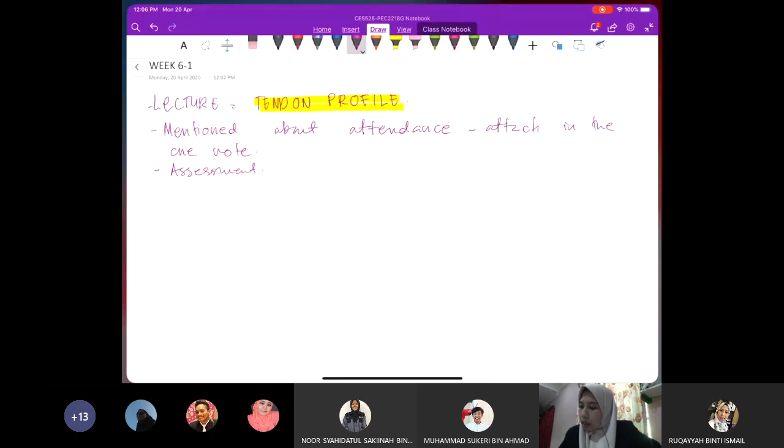Okay. So today, for your attendance, I want you to pay attention to the content library. Your content library, where you can see your attendance. Okay, does it come up? Later on, I will put the attendance for week 5 somewhere here in this folder, in this section. I didn't finish analyzing yet, but I have copied and pasted it into a proper table, but I didn't put it in OneNote yet.

So I just want you to be aware that when I checked the QR code attendance, there are a few students who didn't scan the QR code at all, like 0, and I don't know, you forgot, or I don't know what is happening. But I think for week 5 it is acceptable because it was just our first trial of the system. So I hope this week you will be better.

Like I said before, at least try to make at least 2 QR code scans throughout the week. I know you can assume anything you want, but I hope for honesty here. That means once you scan the QR code, it shows that you are going through the notes, or you are doing exercises, you open the slides, or you open the video and things like that. Anything related to the course means you deserve to scan the QR code.

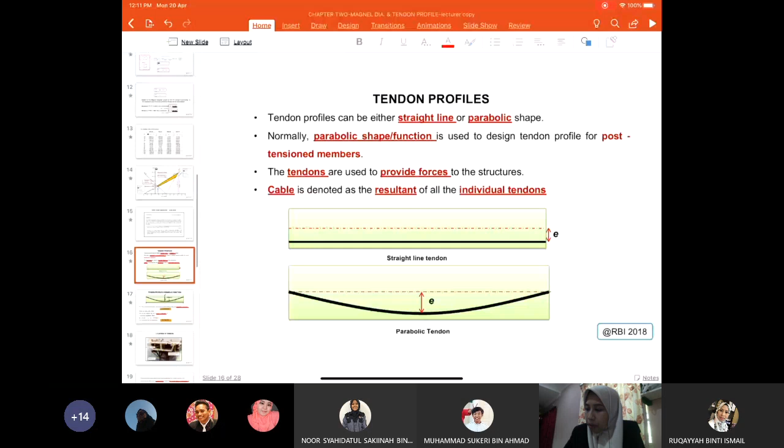So let us continue our next lecture. Inshallah it's a very short one. Because when I see your assessment, the assessment on the Magnel diagram, the example that I asked you to redo and so on, I hope you guys are clear about how to construct a Magnel diagram. And then I did receive a question on WhatsApp during the weekend, which is good, alhamdulillah.

So I know that you guys are trying to do it, trying to understand it, which is important. Okay, so anyone else who has any problem regarding the topic that we had gone through last week, please let me know. And then please take note, the assessment, I put some kind of range, deadline and so on. It's not really a deadline. It's just a matter of taking note who submitted earlier, who submitted later, that's all. Because there's no marks given. So if you didn't want to do it, I cannot force you to do it.

Okay, but of course for you to be able to understand, you need to do some practice, because this is a calculation. You cannot just read and understand it directly. You have to try and do it yourself. So it's just a medium that I prepare for you so that you can try it yourself. That's all. So don't feel stressed out with the task given. It's not really like you have to submit it, and if you didn't submit, then you don't get marks and so on. There's no marks actually. It's just for you to try and do it and understand it yourself. And of course it's open. You can resubmit. You can submit it anytime you want.

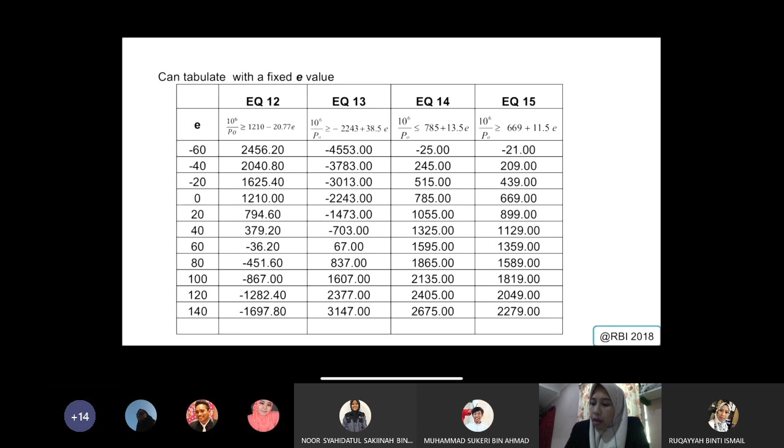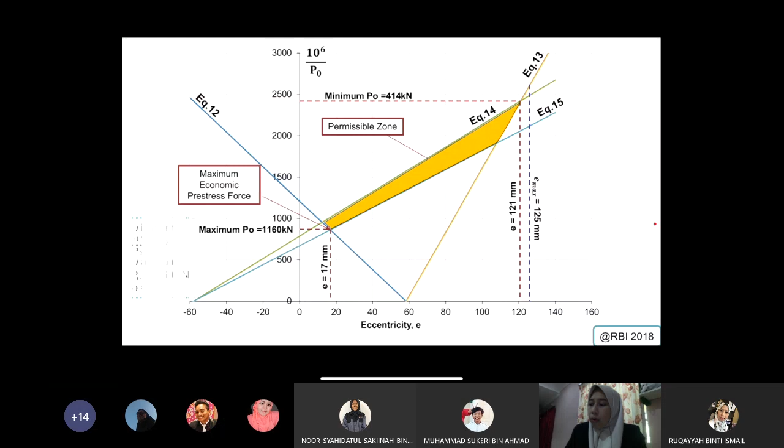Shouldn't be a problem. Okay, so we start with our next method, which is tendon profile. So at this point, what we have gone through before: we know already our E, and we know already our pre-stress force. Because through the Magnel diagram that we construct, we can identify the range of pre-stress force that we want to apply to our pre-stress beam, and also the position of the tendon. So at this point, these two parameters we know already. Once we have our Magnel diagram, next we justify it with another profile that reflects the behavior of the tendon throughout the length of the beam. This we call the tendon profile.

This tendon profile is where we want to see how the tendon behaves, the shape. So it can be either a straight line or a parabolic shape. Normally a parabolic shape or function is used to design the tendon profile for post-tension members. Why post-tension? Because when you have pre-tension, normally you don't have the profile. If you remember the video that we watched in class, with post-tension we have the conduit and the tendon placed before the concreting, right? So before the concrete, you see the shape of how the tendon is laid throughout the length of the beam. That's why mostly tendon profile is used for post-tension, meaning we tension it after concreting.

So the tendons are used to provide forces to the structures. And the cable is denoted as the resultant of all individual tendons. Sorry. Normally we have more than one tendon in one beam, so we call it a cable where we have multiple tendons. So instead of the Magnel diagram, where normally we have the cross-section of the beam, where we estimate the neutral axis and the position of the eccentricity, the E, and so on, the relationship or equation we derive from the section of the beam.

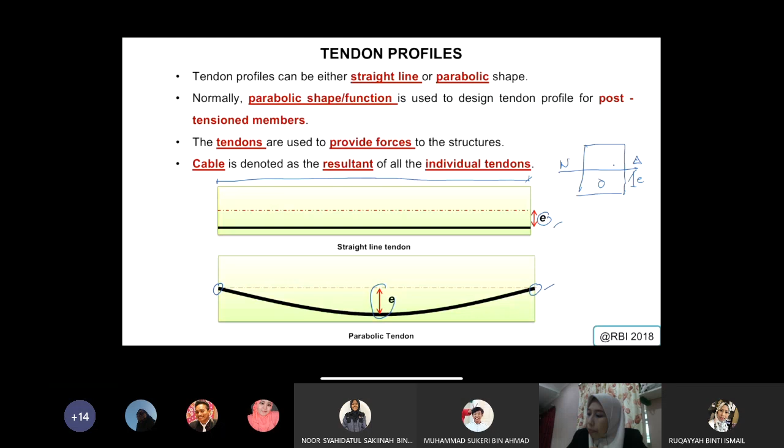And we also can have what we call a parabolic tendon. When you have a parabolic tendon, normally it will have 0 and 0 at both ends of your beam, and you have the maximum eccentricity occurring at the mid length of the beam. So we don't really have a problem when the tendon is a straight line.

We have issues in terms of estimating what will be the value of y, for example at this point, when the tendon is a parabolic shape like this, like what we see in the slide. So this is what we call a post-tensioned beam. Normally we assume that the tendon will behave parabolically.

So we assume that the tendon will have what we call a parabolic function, or quadratic. You're familiar with the quadratic function, where y = ax² + bx + c. So at this point, we want to know what the y value will be, which will be the a.

And then x will be the distance from the end to the mid length of your beam, and you have your L, the actual length, and so on. So these are all the parameters. So how to get the values? We assume that when x = 0, y = 0, so c = 0.

At slope 0, you differentiate this equation with respect to x, then you will get 2ax + b. With 2ax + b, and assuming your coefficient b = 0, you can conclude that at x = L/2, y = a, and A = 4a/L². That is where you conclude, because you want to know the value at the mid length of your beam, where x = L/2.

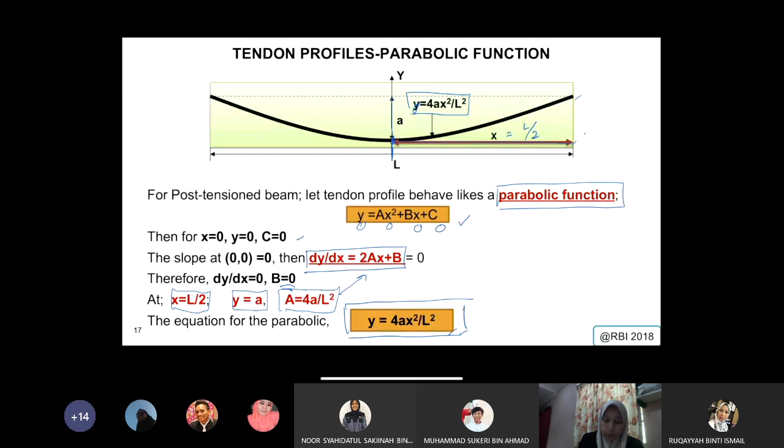So with that, you conclude y = 4ax²/L². This is 4a divided by L to the power of 2. Put all the parameters inside this equation, then you will get these values. I hope I'm clear. Try and put it inside the formula. If you have any problem, let me know.

Okay, location of the tendon. This is just to show you the location of the tendon. This is normally what we call the permanent post-tension tendon. PT is post-tension anchored on the face.

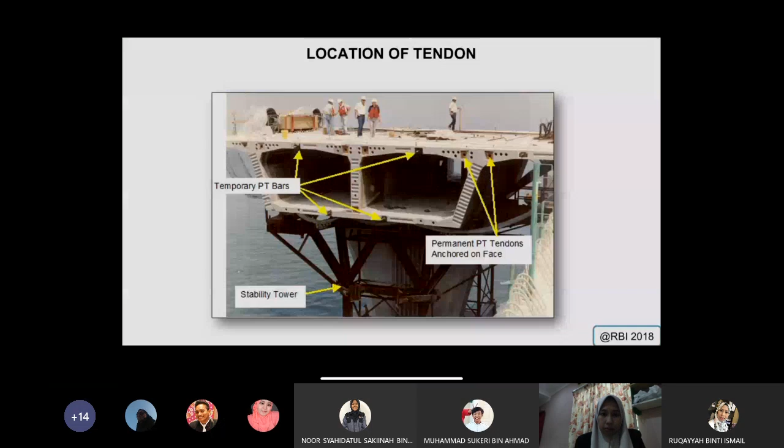Okay, all right. So after the pre-stress force is determined and satisfied at the critical section, which is what we did with the Magnel diagram, it is necessary to determine the eccentricity at which this force must be provided, not only at the critical section but also throughout the length. So in general, from the Magnel diagram, we know the range of suitable pre-stress force. We can check whether it is economical or not and things like that.

But for the tendon profile, you want to determine the eccentricity not only at the critical section. The Magnel diagram identifies E at the critical section because we consider the cross section, the distance from the neutral axis, but you also want to know E throughout the length of the beam. So that is why we need the tendon profile.

So at any section along the member, E is the only unknown term in the four expressions. So for the tendon profile, we're only concerned with the eccentricity value, and this will yield two upper and two lower limits, which must all be simultaneously satisfied. So we have four inequality equations but only one unknown, which is E. This requirement must be met at all sections throughout the member and will reflect the variation of moment, pre-stress force, and section properties along the member.

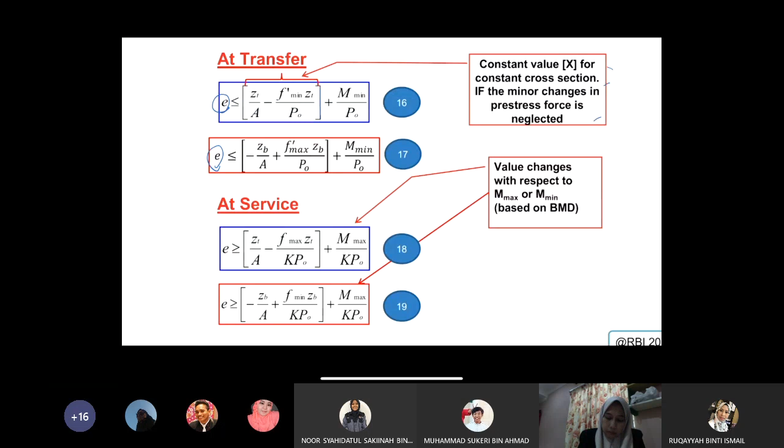So if you notice here, this is what we call the constant of the cross section because these are all fixed. The only one is P naught. If there is a change in the pre-stress force value, normally it will be neglected because it doesn't affect much in estimating the E value, the eccentricity for your tendon profile. So the value changes with respect to moment maximum and/or moment minimum based on your bending moment diagram.

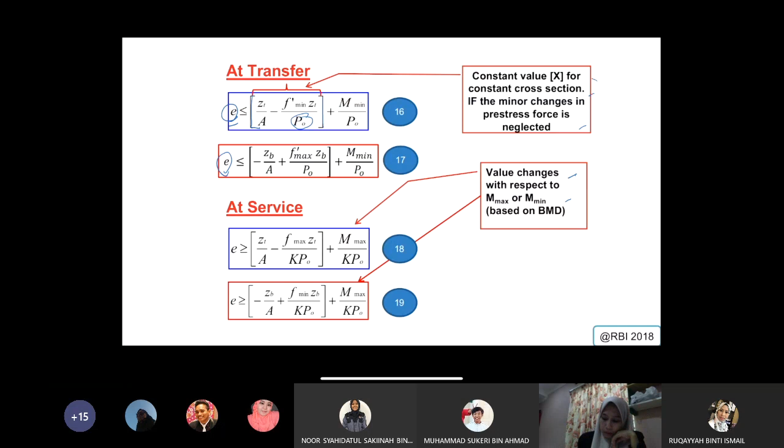So when you're talking about across the length of the beam, you are actually talking about the bending moment diagram, where you know where your moment maximum and moment minimum will be, especially when you have a continuous beam. If it's just simply supported, it's very straightforward, because you're going to have zero moment at both ends and the maximum at mid-length. So you have moment maximum and moment minimum.

So evaluate the equations at any section to determine the range of eccentricities within which the resultant force P naught must lie. Moment maximum and minimum are those relating to the section being considered, so we calculate the moment maximum and the moment minimum. For a member of constant cross section, if minor changes in pre-stress force along the length are neglected, the terms in brackets in the expressions are constants. This is what we mentioned just now.

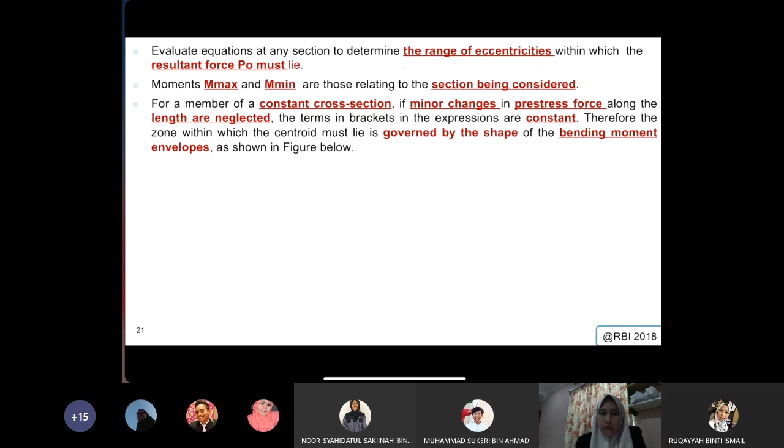Therefore, the zone within which the centroid must lie is governed by the shape of the bending moment envelope, as shown in the figure below. Along the beam, say this is your beam cross section along the length, you identify your centroidal axis. Oops, it doesn't appear on your screen.

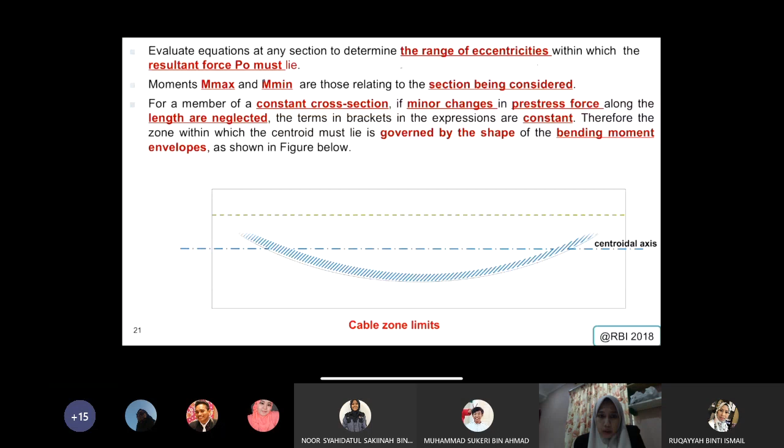All right. You will see this line. Let me try to draw it back. This is what we call your tendon profile at E. This is equation 1. The distance from this point to this point is your moment maximum divided by the pre-stress force. Then you have a second equation whereby you might have another profile.

This is another tendon profile, and then you have M minimum over pre-stress force. So the profile is normally generated from the value of moment maximum and moment minimum, which differentiates one profile from another. All right, so here you have the cross section equations that we mentioned in the previous slide.

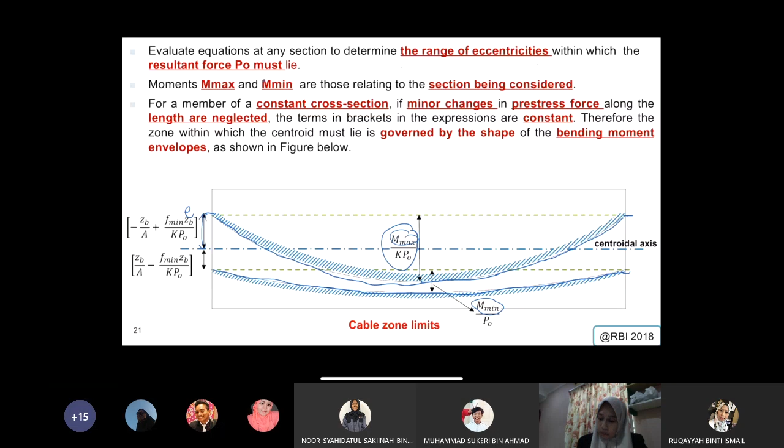All right, so let's take a look at the example. It's quite straightforward to understand. Example 7 continues from the previous examples 4, 5, 6, so all the parameters remain the same. You have limits at mid-span and at the ends of the member designed in the previous example for a constant initial pre-stress force of 700 kilonewtons. So that means we have decided.

Remember that from the Magnel diagram, we have the range of P naught. If I'm not mistaken, P naught has a range of something like 1400 or something, like 400 something kilonewton. So within that range we decided to take 700 kilonewton, having checked the economical prestress, whether it is economical or not. So we checked that and decided to take 700 kilonewton for this question.

So we rearrange the formula. We take e as the main parameter to draw your tendon profile. And if you look into this formula, why I did it like this, actually you can do this for the previous prestress equation as well, because these four equations have the same values, the same z. This one is zt over A, this one is zt over A.

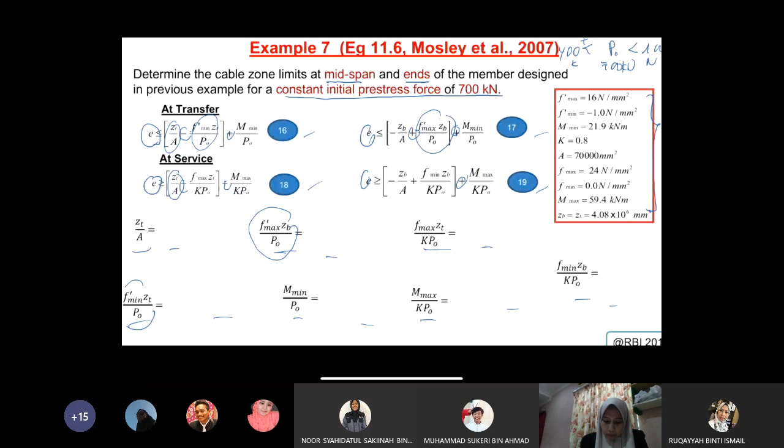And then you have a parameter of f dash maximum. So this is f dash maximum, and this is f dash minimum. So zt, this is f dash minimum. Sometimes the difference is only in terms of plus minus value. So it's good if you calculate all the values separately, then put them inside the formulation. And like this we have all values calculated.

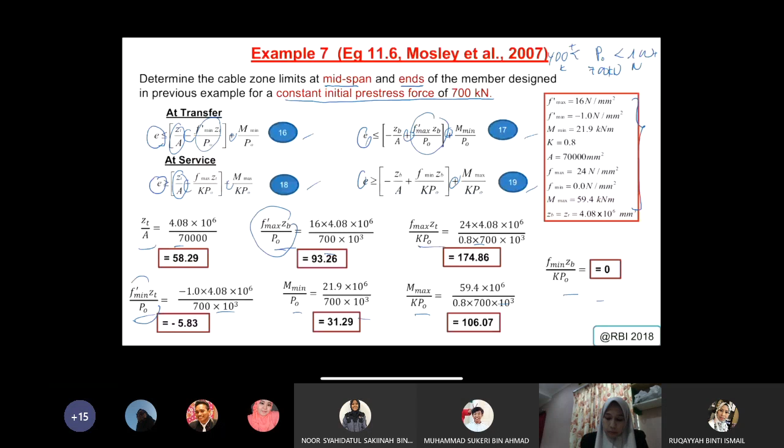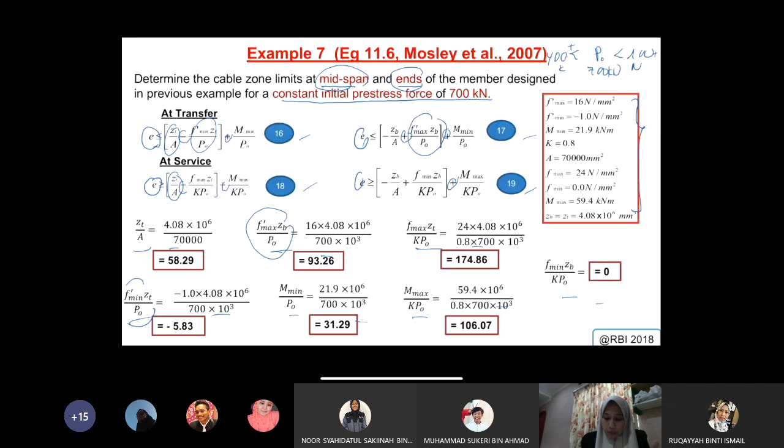Later on, I will give this assessment for you to redo example 7. We have two conditions, whereby the question says determine the limits at mid-span and also at the ends. So in any question given to you, you want to know at mid-span or at ends or both, and you have to identify them one by one. For example, here we identify the ends of the beam first. At transfer, you have this equation plus 0. You look here, it is 0.

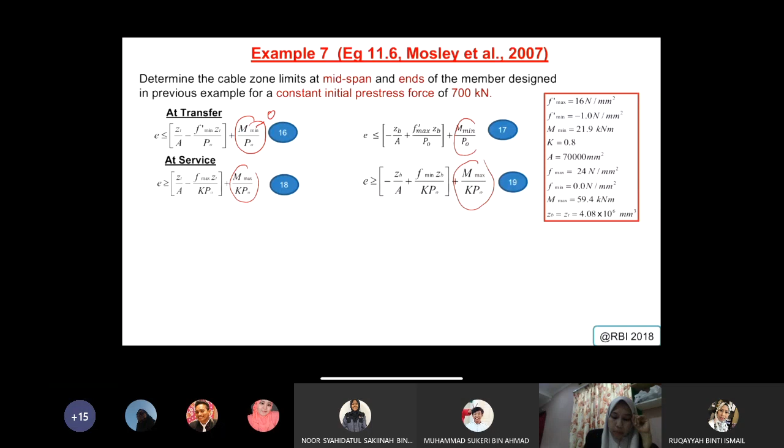At transfer and also at service, the same thing, you have 0. Why 0? Because here it is all moment: moment maximum, moment minimum at transfer and also at service. At the ends of the beam, when the beam is simply supported, the end moment equals 0. So that's why you see every equation plus or minus with 0 at transfer and also at service.

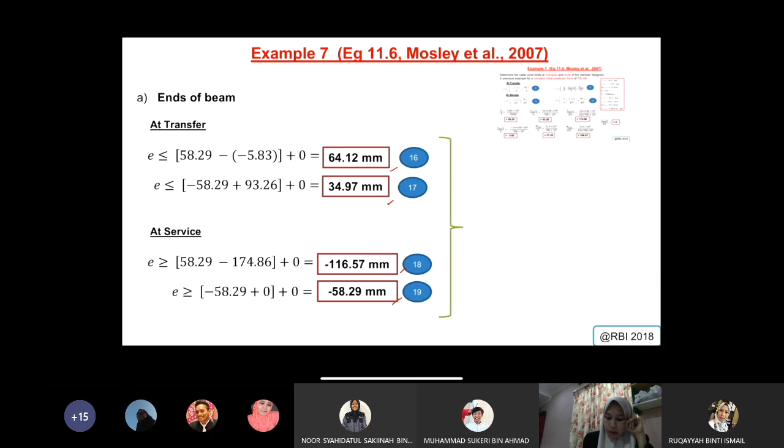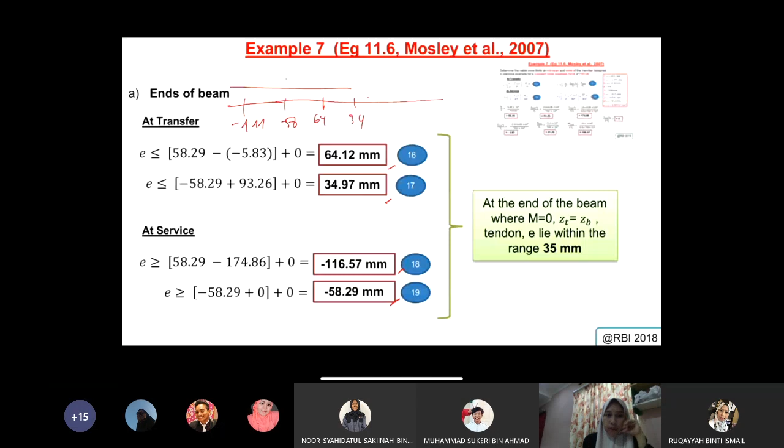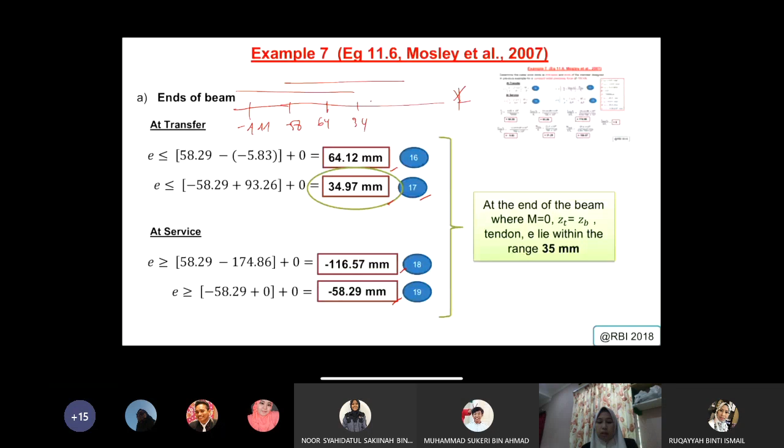At mid-span, we consider this point at transfer. At this point you have a value because we have the moment maximum and moment minimum. Bear in mind how to calculate them: moment minimum considers only self weight, and moment maximum considers all weight. At mid-span, the resultant must lie within 47.8 to 66. When you want to draw, you need graph paper. Draw the tendon profile on graph paper to get accurate scale values.

So in general, at transfer and at service you have equations 16, 17, 18, and also 19, at mid-span and also at end span. This is end, this is mid. So how are we going to draw it? In general, you have this as the height of your beam, your e. The height of the beam we considered just now is 350. Here we already subtract the cover, around 25, 30 like that. So this is the range we estimate for your e.

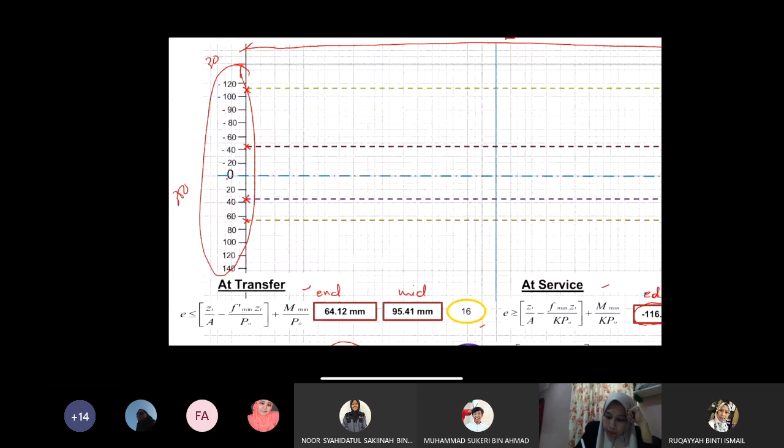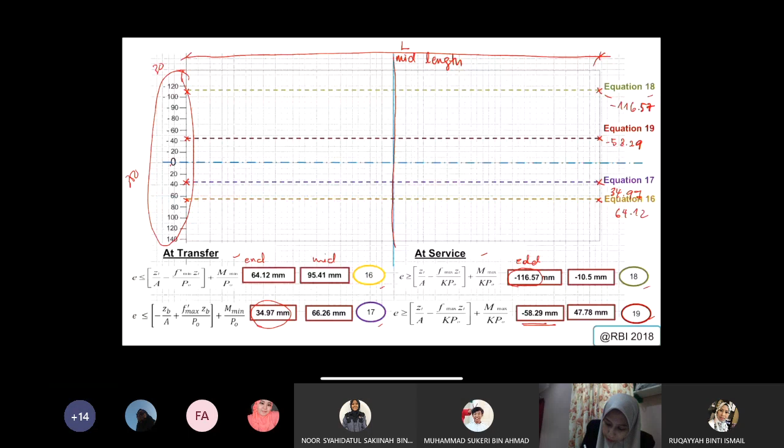Okay, then you mark what we call the mid length. Okay, this is the mid length, the mid length of the beam. Then when you already mark the mid length, you start to make a point. This is one point. Say that I mark it in green, as I put it here. It's green, which is equation 18, which is marked as minus 10.5.

Okay, right? Then I mark the second equation, which is equation 19. The color I put here is red, which is 47.78. Okay, right? Then I mark another color, which is purple. I don't really have purple, so I will just draw orange here instead. So somewhere here, it's a bit confusing. Okay, I draw blue. Blue somewhere here, which will be 66.26, which is this value, equation 17.

Okay, equation 17. Alright, then I have another color, which is the orange one somewhere here, which is equation 16. This will be 95.41. So if you look here, it's actually somewhere here. Okay, 95.41. So that's why it's very important for you to get a good graph paper so that you can get an accurate scale.

Okay, so far you guys following me? Supri, okay? Okay, madam. Who else? Fitri, okay? Okay, madam. Jacqueline, okay? Okay, madam. Izati, okay?

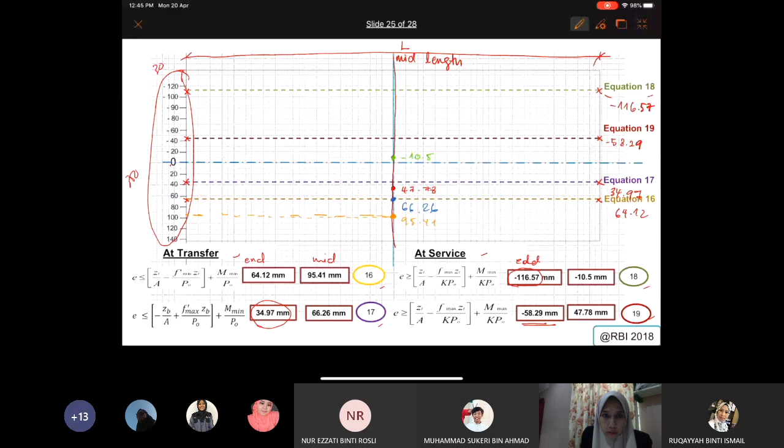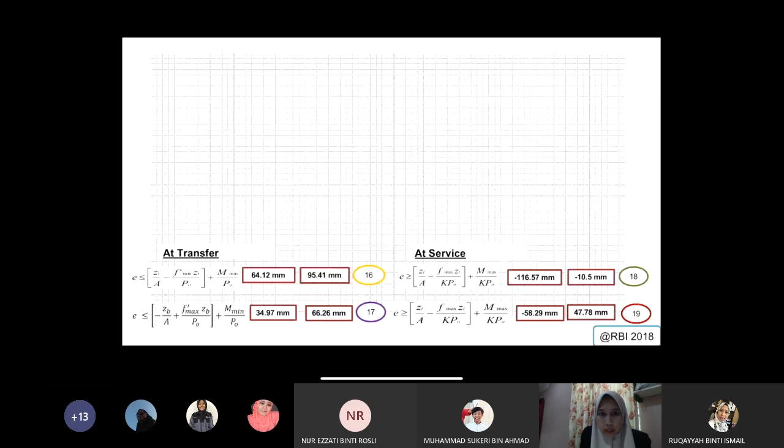The line is a bit laggy, okay. You can see the line, let me start back. Internet a bit slow hari ni katnya. Okay.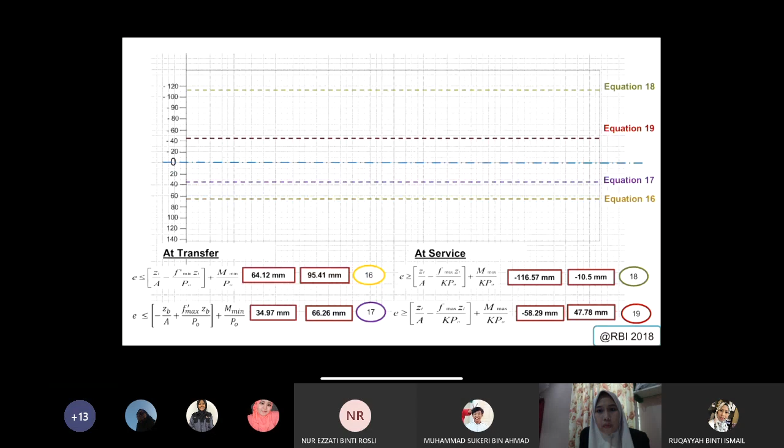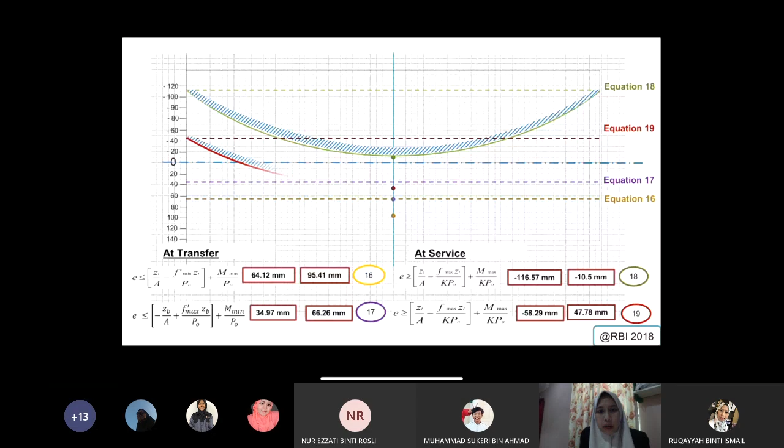Okay, then you have the midpoint. Right, so you have the first line somewhere here. Alright, so you have this point at the end of the beam. You draw it and then you have it at the midpoint here. This is the value. And then you join it to the other side. Since this beam is what we call symmetric, because the section is the same, you have the same parabolic equation, as you can see the right side is similar to the left side. So it's like a mirror profile.

So you do the same thing to equation 19, and also

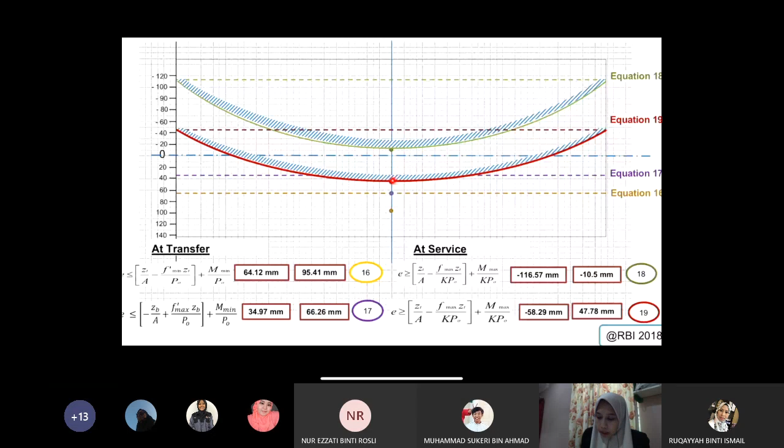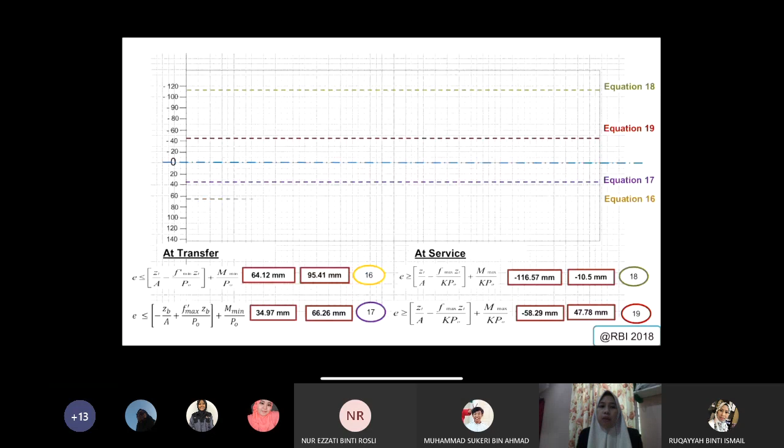Allahu Akbar, sorry. Because the internet is a bit laggy. Cannot see the line yet. So when you run the PowerPoint by yourself, you can see it clearly.

Okay, and then you have equation 17, equation 16. Okay, then you will see this. So you will see the inequality bounded lines, where this is the zone, the range of the zone for your E.

Today's lines are quite bad. I didn't get a smooth one.

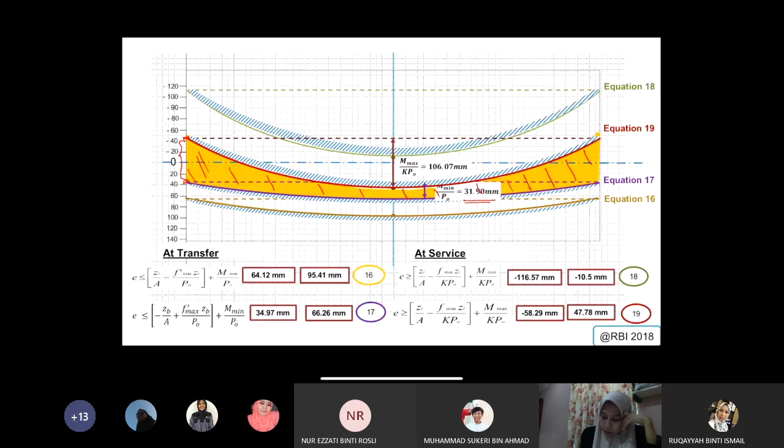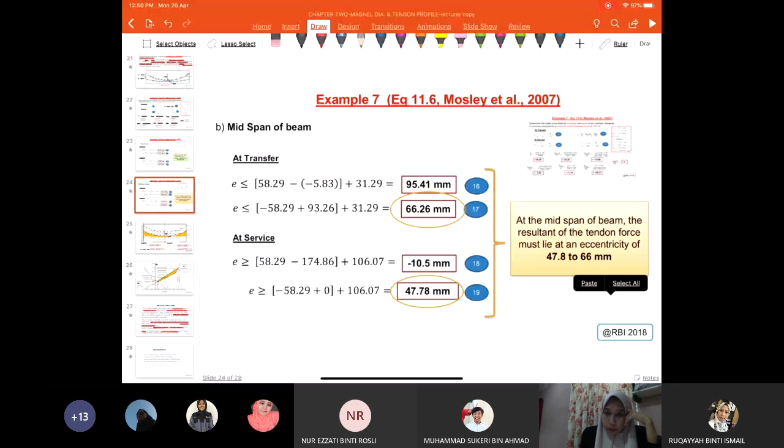From the equation, let me just show you back. Somewhere here, right? This is where you conclude that the range is within 48. Within 48 to 66, 47.8 to 66 mm, or we can say it is within 48. And when you draw the,

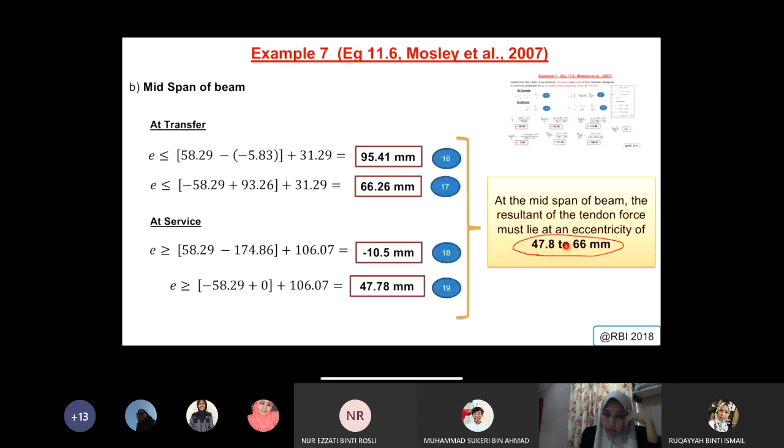I think I'll just try not to do the slideshow.

So here is where your 48 is, within this now, right? So you have within 48 to 66, somewhere here. Sorry, 66 is somewhere here, and then you have around 48. Equation 17 and also equation 19. These are the two equations that bound it. The zone is bounded by equation 17 and equation 19. So you can see the same equation 17 and equation 19.

So the value will be 47.8 for equation 19, somewhere here. All right, bounded with the value of 66.26, somewhere here, for equation 17. At the midspan, this value and also this value.

Okay, I hope you can see. Sorry, when I point it out, it doesn't appear in the slide that I share. Okay.

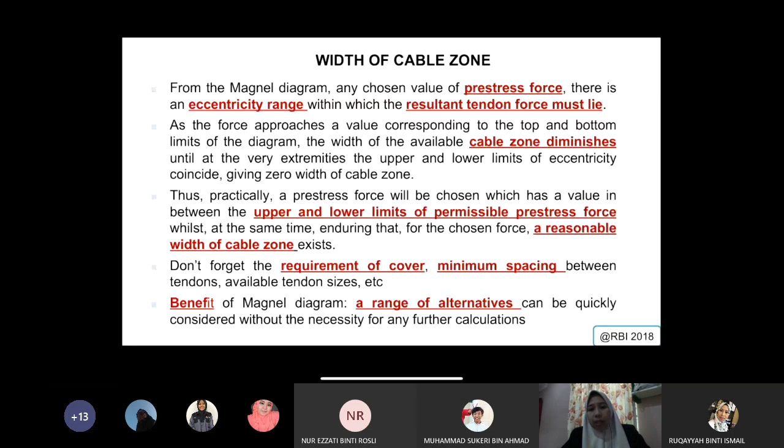Okay, so I will release, all right, and try and redo. The only way for you to understand is to redo. That's the only way that I can say. Sometimes due to our online setup, the internet and so on, it's not smooth. I experienced some lagging here, because when I already explained, I thought I already showed it to you, but what you see is a bit lagged. The line comes out slowly.

Okay, so I will release an assessment just to see how many of you are doing it at home. In general, it's not that difficult for you. You just need to redo the example. Just a matter of doing it yourself, plotting it yourself, really understanding how to calculate, punching the calculator yourself, and then checking whether you get the same value or not. So just copy back the question for the assessment. When you do calculations, it's important for you to write it out and really understand how you get the value.

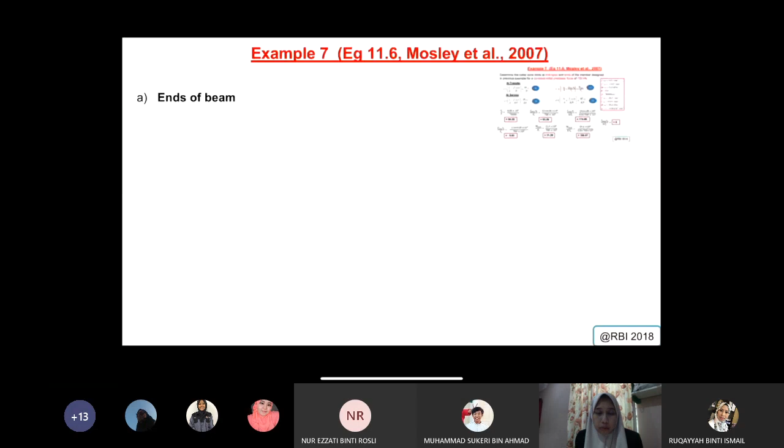Okay, so any questions so far that maybe you want to ask? Aina, Shakira, any question? Any questions? Sakina, any question? Shahida, any question? No, madam. Alright. Harisha, any question? Izati, any question? No, madam. Okay.

So I hope everyone is clear. If you're not clear, you can rewatch this slide. And just to let you guys know, in the YouTube channel, I have uploaded other classes' recorded sessions as well, so you might want to watch them too. When having 3 different classes, I'm not a machine, so sometimes the explanation might be different; maybe I told your class a point but not their class, or vice versa. So you can check those videos to have a different view. Probably it can give you more input and understanding of the chapter.